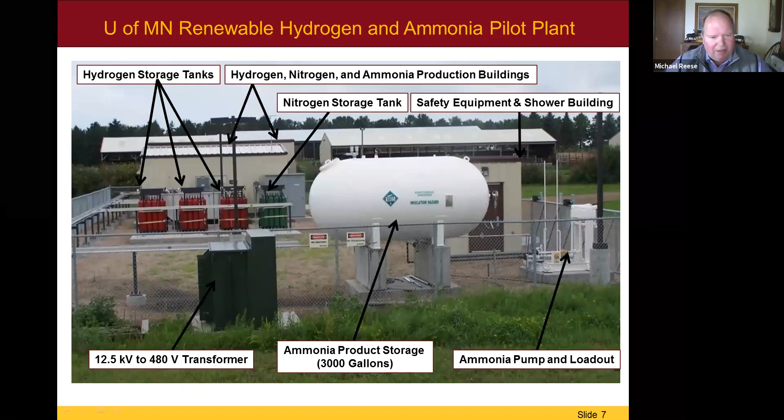Here's a picture of our pilot plant located at the Research and Outreach Center near Morris. We bring power in from a 1.65 megawatt wind turbine and use that power to electrolyze water in the buildings in the background. We pull nitrogen from the air, separate those two, and store them in the tanks in the foreground - the green tanks are for nitrogen, the red tanks are for hydrogen. We then combine those together to form anhydrous ammonia, and store it in the ammonia product storage tank in the foreground. We also have ammonia pump and loadout facilities, so we can fill nurse tanks or tanker trucks as well. This is a relatively small pilot plant - we can produce about 6 pounds per hour with this plant.

Green ammonia is, I think, an elegant concept where you can take wind energy, water, and air to produce nitrogen fertilizer and use it on the ground soil below the wind turbines. When we first began working in renewable energy and looking at installing a large-scale wind turbine, we ran across some of the same problems other developers ran into: limited transmission capacity and utilities having difficulty managing the variable nature of wind and solar PV.

Wind mostly is generated in the evening when there's low load, and in seasons where there again is lower load requirements. So the question is, how can we monetize wind energy and make a product that we can market in Minnesota and across the Midwest?

So in this process, we're electrolyzing water. We're separating nitrogen from air, removing the oxygen and argon in a molecular sieve. Then we're using the hydrogen and nitrogen gas in a traditional, or conventional, Haber-Bosch process.

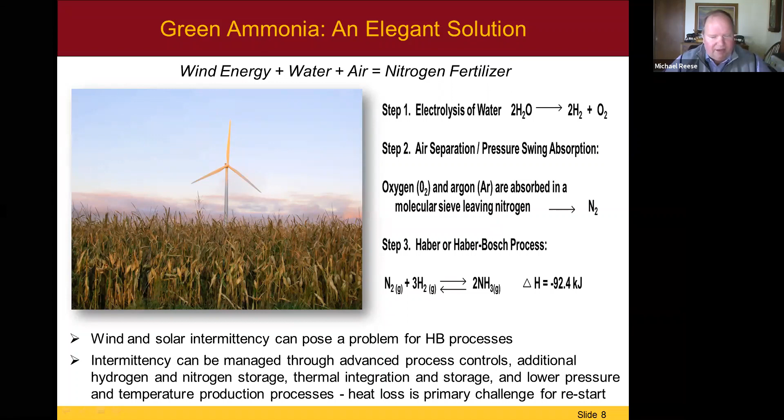Wind and solar intermittency can also pose a problem for Haber-Bosch processes. So we've looked at technology to mitigate those issues, including managing them through advanced process controls, additional hydrogen and nitrogen storage, thermal integration storage, and lower pressure and temperature production processes. Heat loss is a primary challenge for restarting the process.

And this is just for fertilizer. We'll talk a bit more about using anhydrous ammonia for energy as well. But overall, wind resource is synergistic with Midwest corn production and nitrogen fertilizer demand.

It's inherently distributed, so you can think of small scale or moderate scale ammonia production facilities located in the Midwest where we have the renewable energy as well. US nitrogen fertilizer demand could be met with approximately 50,000 megawatts of nameplate wind energy capacity, and current US wind generation is 105,000 megawatts of nameplate capacity.

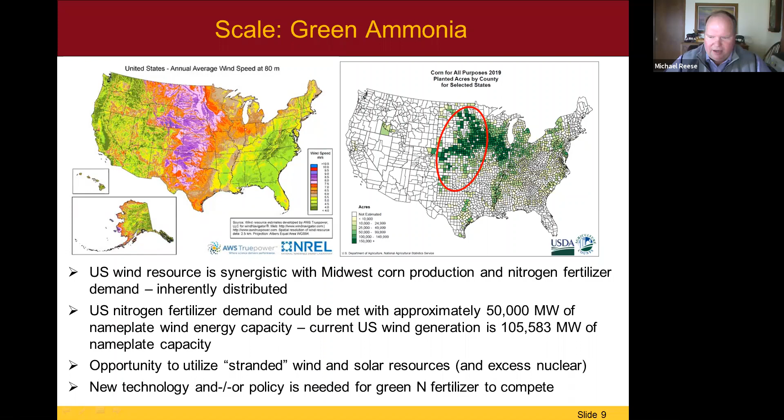So why green ammonia, and why now? As I said, we've been working on this since 2013 with our pilot plant, and actually before that, since the 2003 timeframe, developing the system. There's essentially a convergence of three primary factors.

There's an increased motivation on a global basis to address changing climate. Current nitrogen fertilizer production is responsible for 1% of all global greenhouse gas emissions. Policy investment dollars are moving towards technologies and companies that support lowering greenhouse gas emissions.

The second reason is there's a financial motivation to store low-cost intermittent renewables and excess nuclear power caused by increased renewables on the grid. At times, wind can be 1 to 1.5 cents or lower in pricing on the grid, so it makes sense for processes that enable us to take advantage of those low-priced renewables.

Then there's a realization, I believe, that ammonia is one of the best, and perhaps the best, option to store and transport hydrogen, which could be important from an energy storage standpoint, but also as a fuel for transportation. When we talk about fuel for transportation, I think overall we're moving more towards electric vehicles, but there's also a niche for larger scale transport, such as rail and marine applications, where ammonia might fit well.

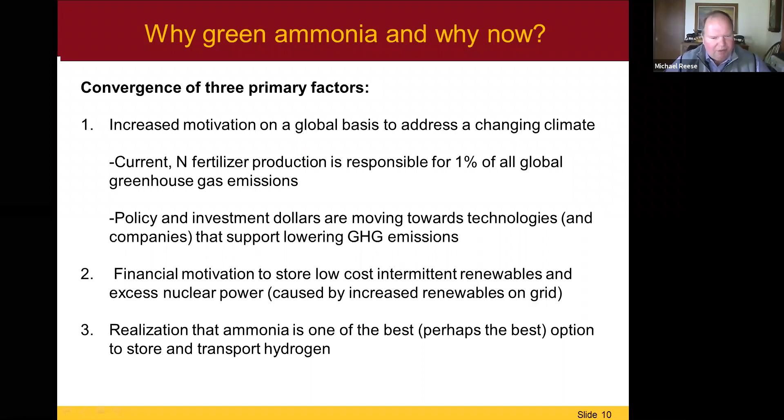So there's been a lot of news about hydrogen, green ammonia recently. We've had our share as well, but what some might not realize is that the amount of activity happening across the world with green ammonia—companies such as Siemens, major corporations worldwide—are looking at green ammonia to meet challenges of the 21st century in terms of greenhouse gas emissions for agriculture, as well as meeting fuel requirements or green fuel requirements worldwide.

This Business Wire publication indicates that in 2019, there was $17 million invested in green ammonia, and they're projecting by 2030 they expect $852 million, which is a 55% increase during that period of time. And most of this is expected to be for power generation segments using ammonia for energy storage. That actually might be a light or a very conservative estimate.

You see other companies looking at ammonia, green ammonia. There's an Air Products project in Saudi Arabia, a $5 billion green ammonia hydrogen project. Green ammonia is being looked at for marine applications worldwide and other interesting activities related to green ammonia. I think it's also important to note that most, if not all, the world's leading ammonia production, engineering, and technology companies are working on zero carbon ammonia, and not only for fertilizer, but also they view it and others view it as an opportunity again for transportation, fuel, and as well as energy storage.

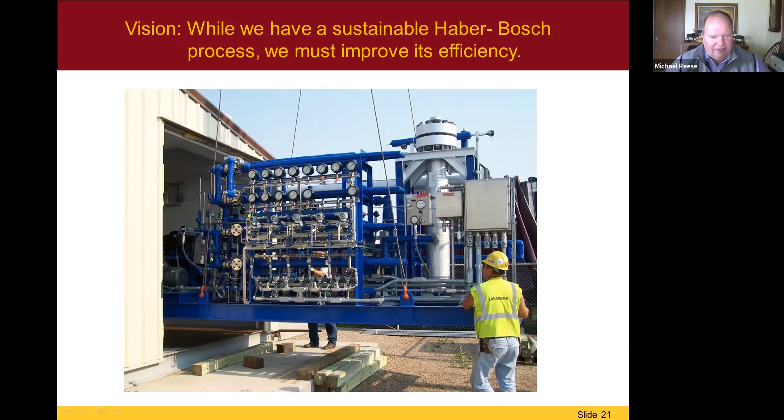This is a picture of our ammonia production skid, and this is a conventional Haber-Bosch process that we installed at Morris. What we found is that it's not efficient enough at the small scale to compete against conventional natural gas-based ammonia production. So we teamed with researchers at the University of Minnesota Department of Chemical Engineering and Materials Science to develop new technologies. And Alon McCormick, Ed Cussler, Lanny Schmidt, Prodromos Daoutidis, and others developed a patented process that we term absorbent enhanced ammonia production.

So we're taking salts and we're absorbing ammonia as it's being produced. And then we can do that under lower pressure, lower temperature atmospheres. What results is a lower capital investment, about 40%. We do have some higher energy consumption, but we haven't integrated the thermal portion of this process yet, so we believe that could be improved. And then overall, this process is less expensive at smaller production scales.

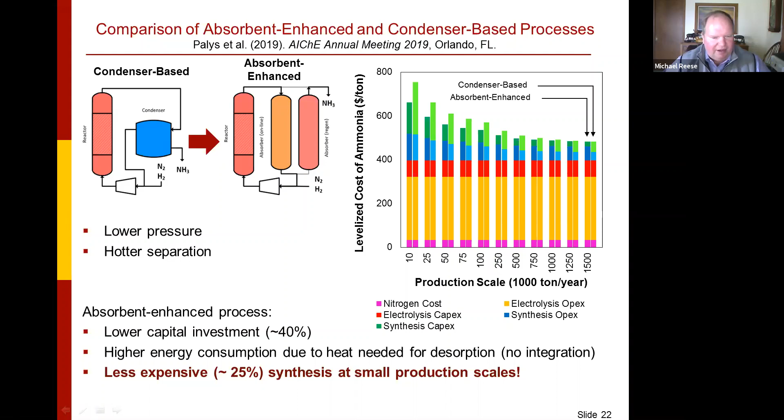So my colleagues Matt Palys and Prodromos Daoutidis did a study looking at the use of anhydrous ammonia for energy storage. They looked at 15 different cities across the US and used data from these particular cities. The model that they used would add in wind turbines or solar PV as needed and energy storage as needed. And each time the model chose both anhydrous ammonia and hydrogen as the best source of energy storage. And the reason for that is that the combination gives the lowest cost.

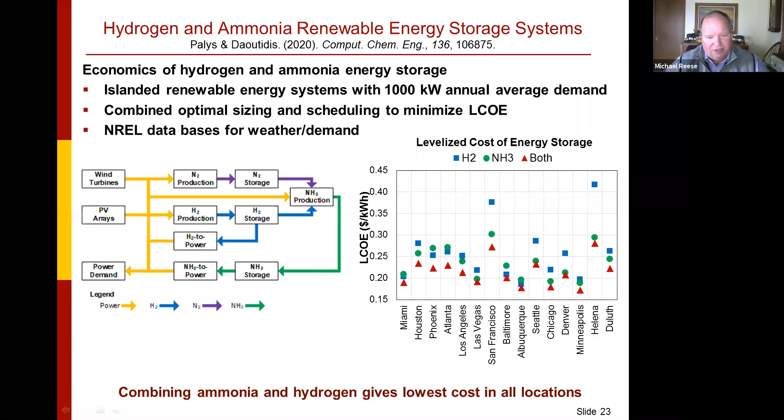Hydrogen is good if you're using it on a short-term basis. Ammonia comes in when you're storing it long-term. And so the reason why ammonia is better long-term is that it's lower cost storage. Hydrogen is very costly to store. And so you want to use that as it's being produced, perhaps 8, 10 hours, 12 hours from when it's produced, use that to generate electricity. If you can't generate or don't need the hydrogen at that point to generate electricity, you use it to produce anhydrous ammonia.

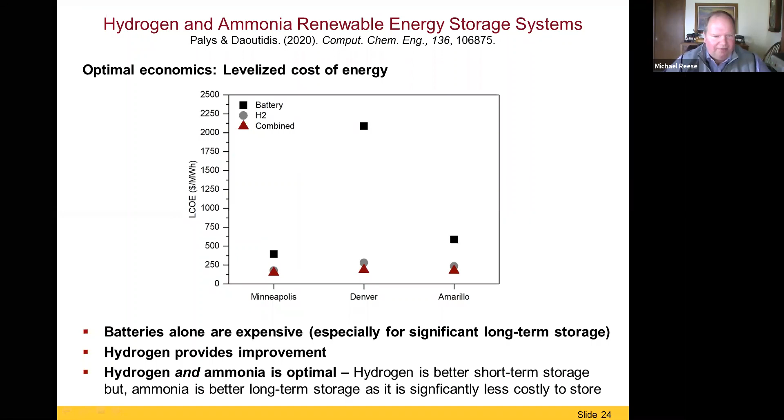You might wonder, well, where do batteries fit in on this? And in this case, I'm just comparing Minneapolis, Denver, and Amarillo, Texas. And both hydrogen and ammonia, in the combination, beat out batteries each time. Batteries are extremely expensive, even though there might be an application for that short duration time when you need instantaneous power, definitely for seasonal storage they're not competitive with ammonia in the case of this study.

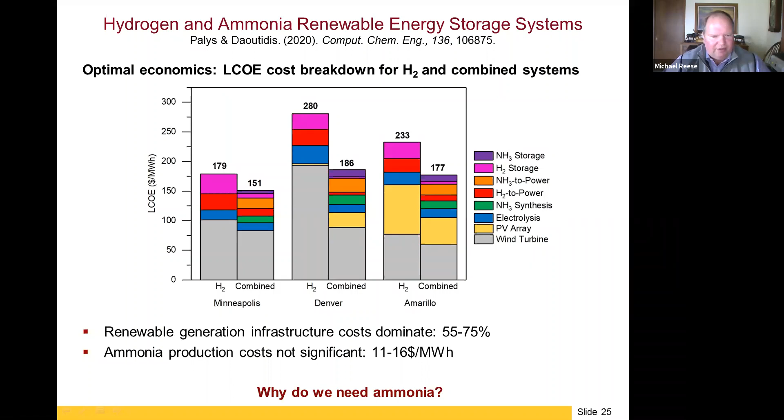This slide shows some of the breakdown of the costs, and if you look at the levelized cost per megawatt hour on the y-axis, one thing to note is that the renewable generation systems were also included in this. The actual cost of the energy storage is very small, with ammonia production being $11 to $16 per megawatt hour. So we're talking a fairly small amount of dollars to store green ammonia or renewable electricity.

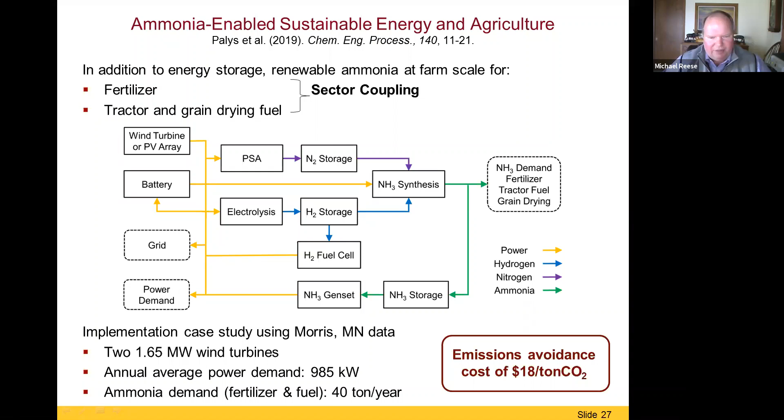So another study again looked at coupling agriculture as well as energy storage, using ammonia for fertilizer and tractor and grain drying, as well as producing electricity when needed. And this study actually looked at sector coupling, bringing the two industries together, and again resulted in an emission avoidance cost of $18 per ton of CO2.

So a colleague of mine in the Department of Mechanical Engineering, Will Northrop, as well as a colleague in University of Minnesota Duluth, Mechanical Engineering, Alison Hoxie, have been looking at using ammonia in tractor fuel and for grain drying and other applications. We believe that it's a good fuel. There's some issues that need to be overcome, and some of the technology that Will has developed has mitigated some of these issues. One of the technologies is a thermal reformer.

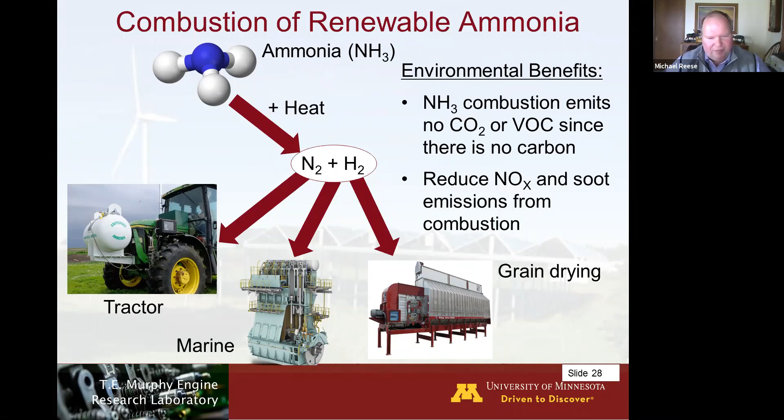Oh, don't have a picture of that, but a thermal reformer basically cracks a small portion of the ammonia into hydrogen. So when you are combusting it, either in a tractor or for grain drying, it's not just pure ammonia. It's a combination of both hydrogen and ammonia, and that resolves many of the issues.

So if you look at the cost of producing green ammonia, I think there's a very wide variety of green electricity pricing out there. Recently, contracts between utilities and wind developers have been in the 1 to 1.5 cent range, and if you look at those numbers, we're getting very close to being cost competitive with conventional ammonia retail prices, at least. We're close to $400 a ton, and right now retail ammonia is close to $550 a ton.

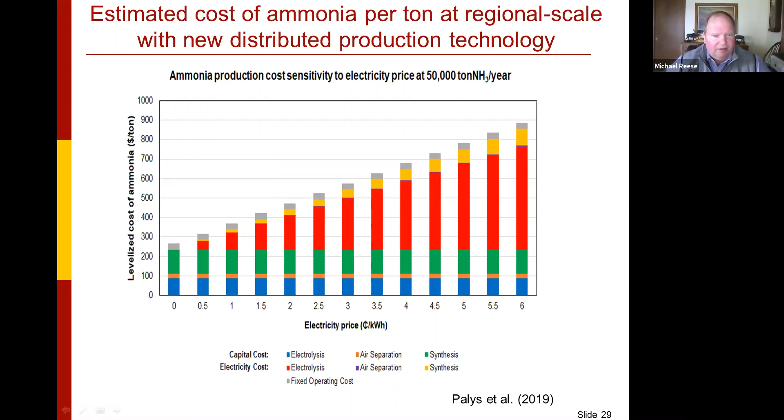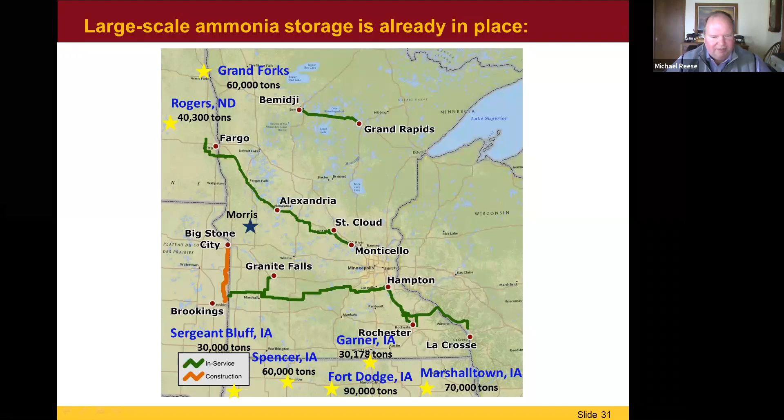We've been working on green ammonia since 2005, and we've developed some technologies at the University of Minnesota that we think are attractive. As part of that, we worked in the REFUEL program through the U.S. Department of Energy to further develop that technology. And we started collaborating with other participants in the REFUEL program. And we recently proposed to the U.S. Department of Energy ARPA-E REFUEL program to develop a large-scale demonstration project producing 1 metric ton of ammonia per day, utilizing the best technologies that were developed in this REFUEL program.

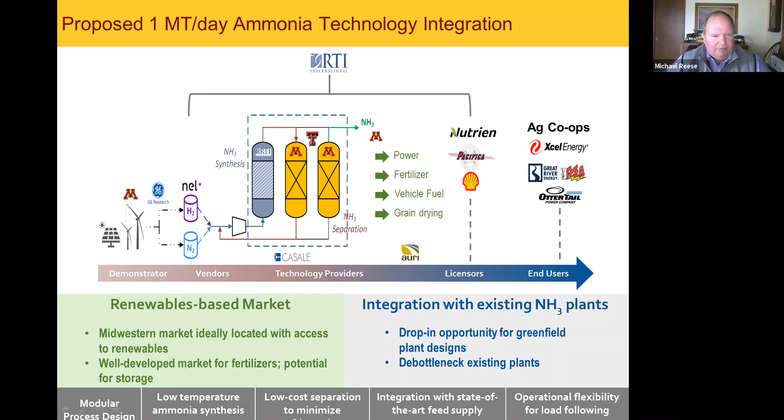And so we proposed a project team that includes the University of Minnesota, led by the Research Triangle Institute in North Carolina, as well as some common names such as GE and Shell, Nutrien, and utilities such as Xcel Energy, REA, and Otter Tail Power. And so we believe we have a good team put together to develop and demonstrate the latest and most advanced green ammonia production facility in the world. So please stay tuned to see if that funding is received. That project will be a 3-phase plan for technology de-risking. It includes design optimization, building a pilot plant, and then demonstrating that pilot plant as well.

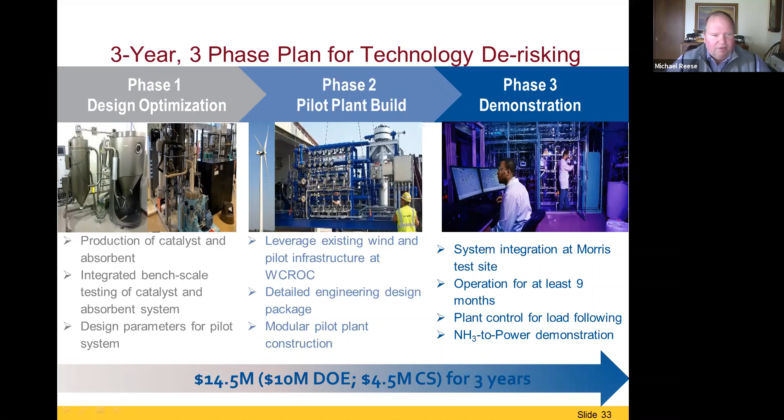So in conclusion, the agriculture industry should play a significant role in green ammonia production and utilization. Conventional nitrogen fertilizer production represents approximately 1% of all global greenhouse gas emissions. So moving forward, I think we're going to see significant pressure worldwide to make changes in that area. The carbon intensity of grain, meat, milk, ethanol, and other ag products is highly influenced by conventional production of nitrogen fertilizer. More and more, we're going to see the push from consumers and consumer groups to lower the carbon intensity of our agriculture products. And so green ammonia is one of the keys to that.

If you look at green ammonia compared to other technologies, green ammonia is a drop-in replacement for nitrogen fertilizer right now. So that's the nice part about it; it's not as disruptive as some of the other potential scenarios where we're reducing carbon intensity of these products. The distributed nature of renewable electricity generation favors regional production of green ammonia over centralized plants. Coupled with the declining costs of wind and solar generation, green ammonia production technologies are becoming cost competitive. And green ammonia presents significant value-added agriculture opportunities via multiple synthesis routes and sector coupling moving forward for Minnesota.

So moving forward, we're working on our pilot and demonstration projects with the REFUEL program. Others are needed. I encourage those of you interested to try to move forward in this area. Education, organization, and advocacy are needed as well. And perhaps some of that is being covered by the Hydrogen Economy Consortium, which is being led in part by efforts of AURI. Green ammonia certification tracking is required. M-RETS is looking into this, as well as others across the U.S. And state and national green ammonia policy could be used to encourage development of a promising industry.